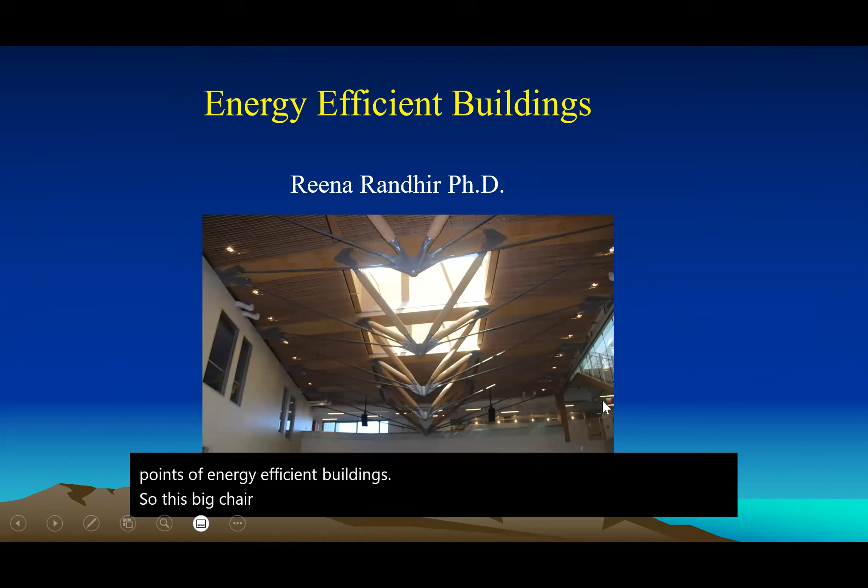We'll go over the most important points of energy efficient buildings. This picture is the ceiling of the green building at UMass, and there are lots of different concepts that were considered when building it. I hope you visit it one day.

The learning objectives of our time together are to understand the significance and benefits of energy efficient buildings, to describe the methods used to determine the efficiency of a building, some of the design elements, and what embodied and operational carbon of buildings is. We'll also understand some terminology in energy efficient buildings, like sustainable building, smart building, intelligent building, green building, and so forth, and some of the policies out there to make our buildings more energy efficient.

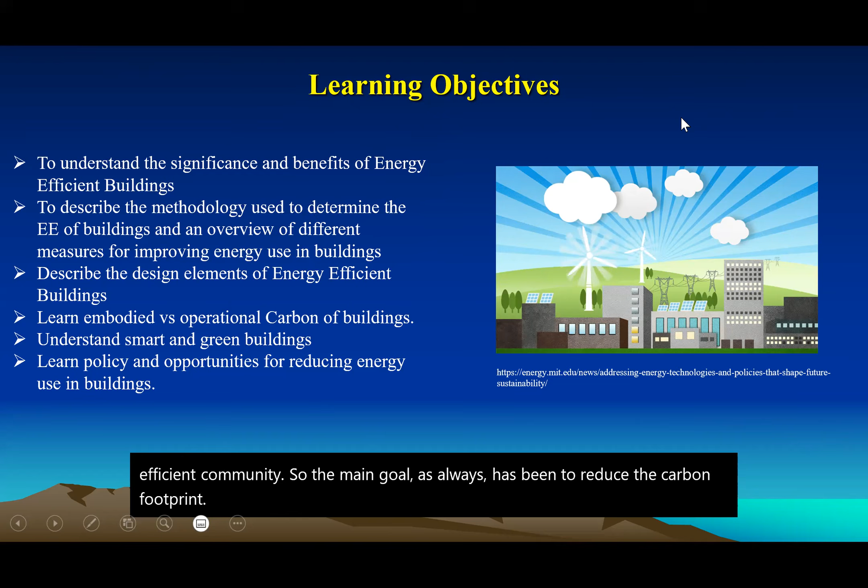So the objective as a community is to have an energy efficient city or energy efficient community. The main goal, as always, has been to reduce the carbon footprint as we transition to clean energy in the next 30 years. These are just some reminder slides.

A very interesting facet is that the richer the country is, the more energy consumption it has. The picture at the bottom shows GDP per capita, and the picture on the left shows that if it's orange or red, the per capita energy consumption is very high. So there's this correlation between GDP and energy consumption, and another correlation with the energy that goes into buildings. It shows that richer countries use more energy, and more of it goes into their buildings, which is also why the carbon footprint is higher in these countries.

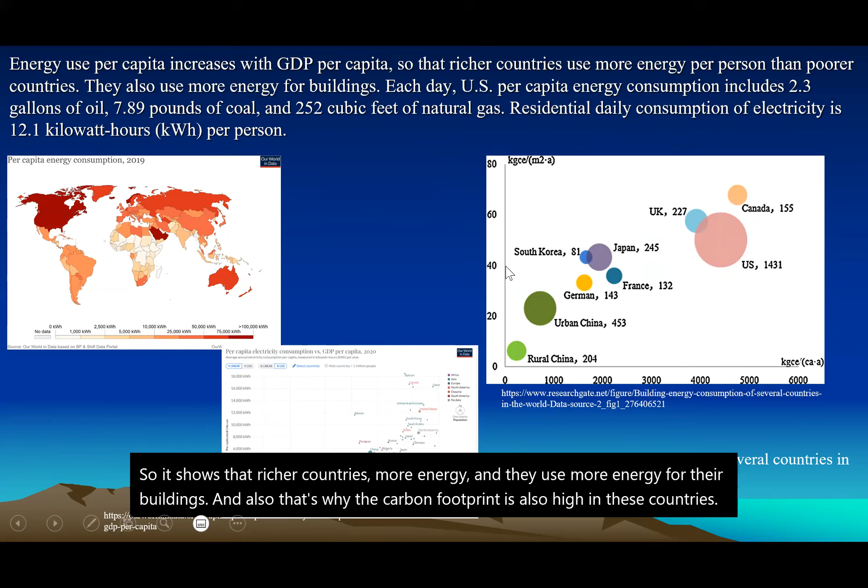Here's some alarming statistics. The United States has less than 5% of the world population, but we consume 16% of the world's energy. Compare that with Europe, which contributes only 6% of the world population and uses about 4.2% of the energy. So energy efficiency and reducing energy consumption in the building sector is vital as we try to meet our energy goals.

Here's another interesting fact: human beings spend about 90% of their time in buildings. The building sector accounts for 76% of electricity consumption, and 40% of that goes to buildings, meaning 40% of carbon emissions come from buildings. That is why it's very important for us to understand energy use by buildings.

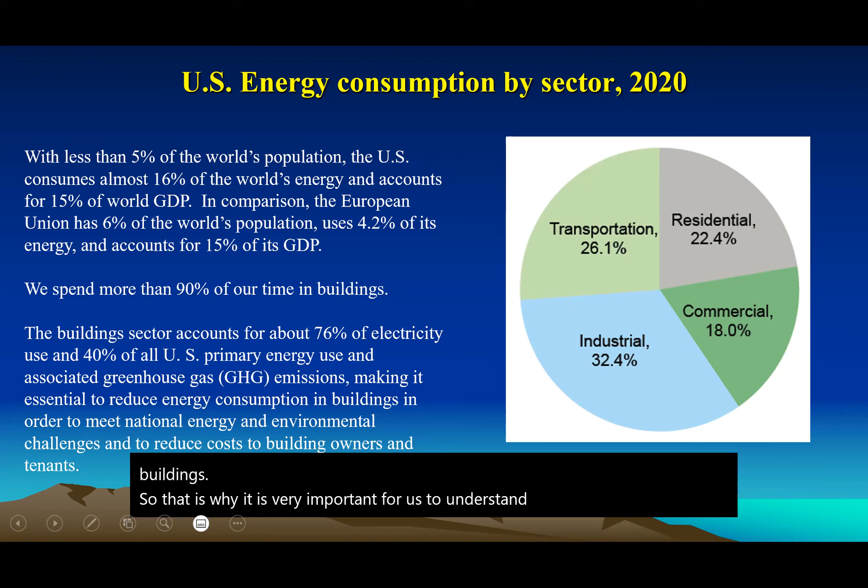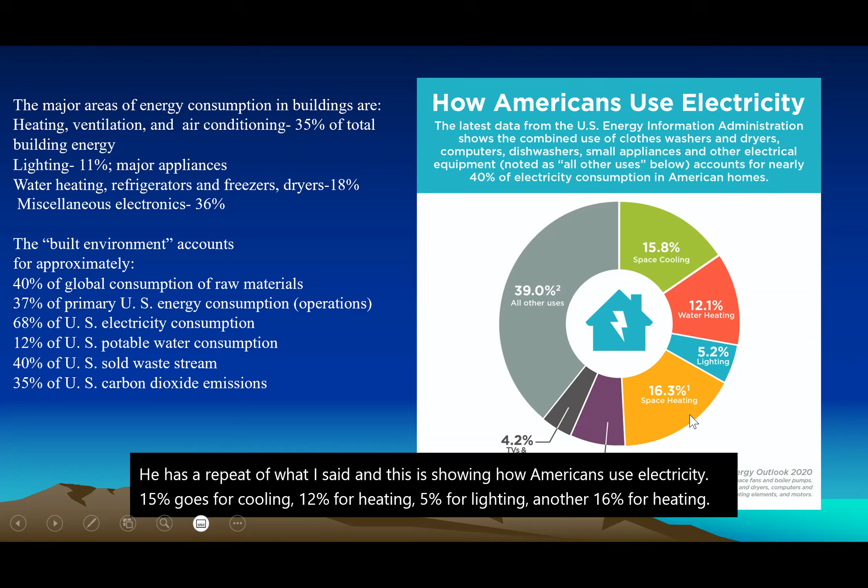Here's a repeat of what I said, showing how Americans use electricity: 15% goes for cooling, 12% for water heating, 5% for lighting, and another 16% for heating. So a majority of greenhouse gas emissions come from buildings.

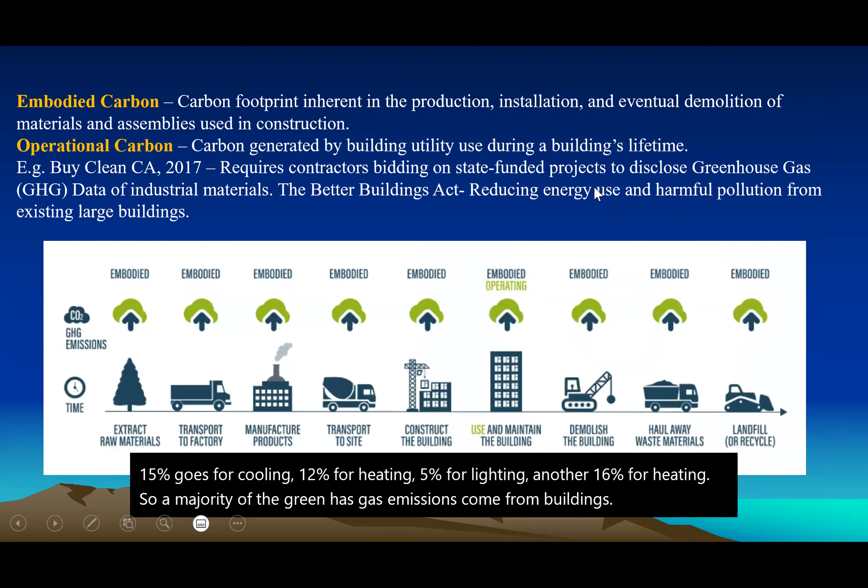This slide shows what embodied and operational carbon is in buildings - like a life cycle of carbon emissions from the beginning to end of a building's history. Embodied carbon refers to the carbon footprint involved in the production of building materials, transport, installation, demolition, and recycling.

Operational carbon refers to the carbon that is emitted when the building is operational, like utilities and so forth.

There are many government agencies that monitor this. The Buy Clean California Act of 2017 required that contractors disclose the greenhouse gas emissions of their building materials. There's another act, the Better Buildings Act, that reduces the energy use and pollution from large buildings. This is only a sample - there are several of them.

This picture shows the timeline of greenhouse gas emissions. When raw materials are extracted - in this case, wood from a forest - if it's a sustainable forest that's replanted, the carbon footprint is low. But in general, if trees are just cut down for buildings, it releases a lot of carbon dioxide into the atmosphere. Transport costs the environment, and when the material is processed and changed, it also costs the environment. Then it's transported to the site where the building actually happens.

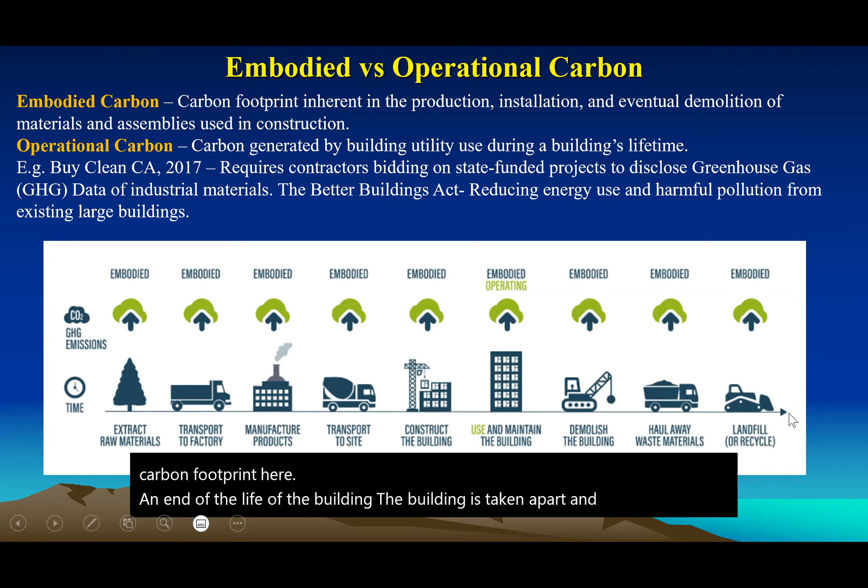After the building is built, there is both embodied and operational carbon footprint. At the end of the building's life, it is taken apart and maybe taken to a landfill or recycled, and again carbon emissions continue. So a builder thinking about energy efficiency should consider reducing energy use at every step of the carbon cycle of a building.

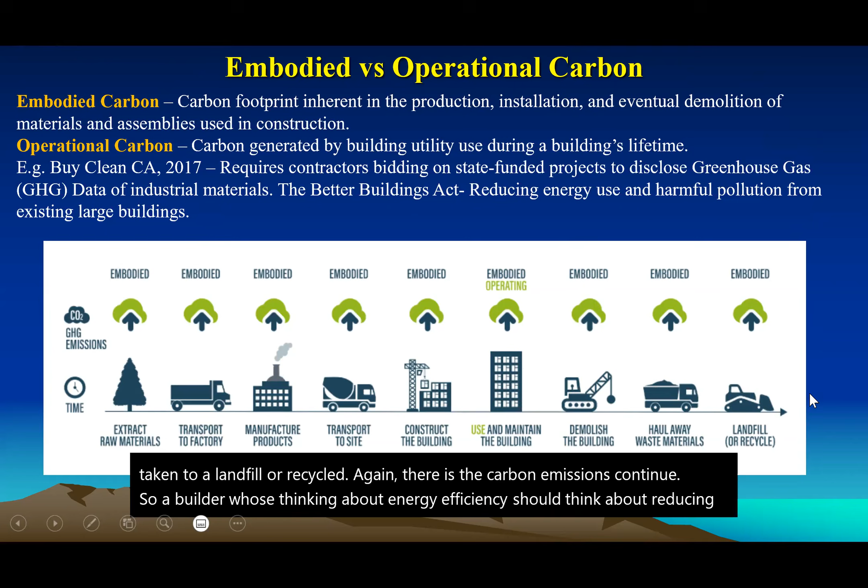So what is an energy efficient building? An energy efficient building is defined as a building that is designed. It begins even before the building is built, so design elements will be considered to reduce the energy use in a building.

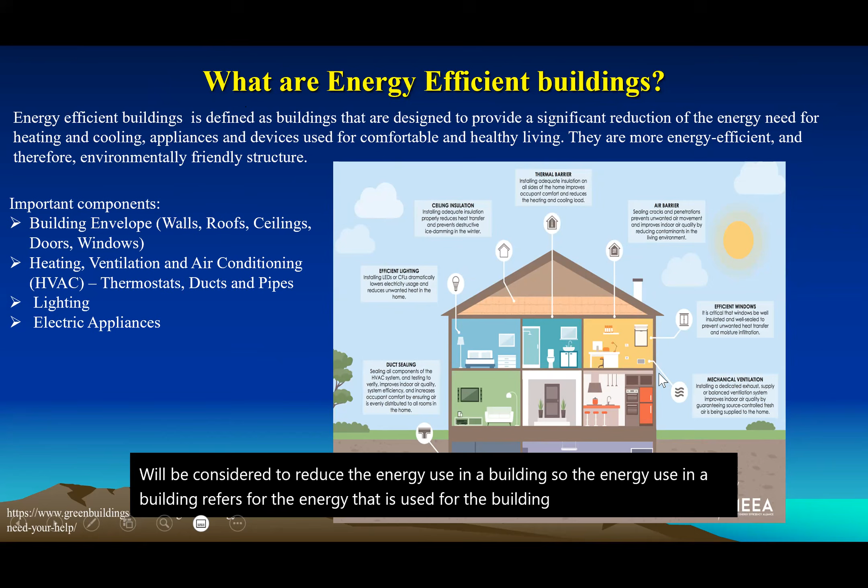The energy use in a building refers to the energy used for the building envelope, which is very important—insulation is very important—HVAC, the heating, ventilation, and air conditioning of the building, the lighting of the building, and all the appliances used in a building.

So an energy efficient building is environmentally friendly, using just the bare minimum of energy that is needed for comfort, safety, and security of the people who are living there.

It is divided into 4 categories. One would be the envelope of the building, which refers to the walls, the roofs, the ceilings, windows, doors, etc. For example, we have seen ceiling insulation in our homes, right?

It is very important to keep the heat in, especially in cold countries like ours, states like us. Thermal barriers, air barriers—all of these will play a huge role in energy efficiency.

Efficient lighting—this is like a summary picture, a typical home with a basement, first floor with kitchen and living room, and then the bedrooms are upstairs with bathrooms.

Energy efficient windows—we've heard of double pane windows, and also there's energy efficient paint that can reflect hot waves in the summer.

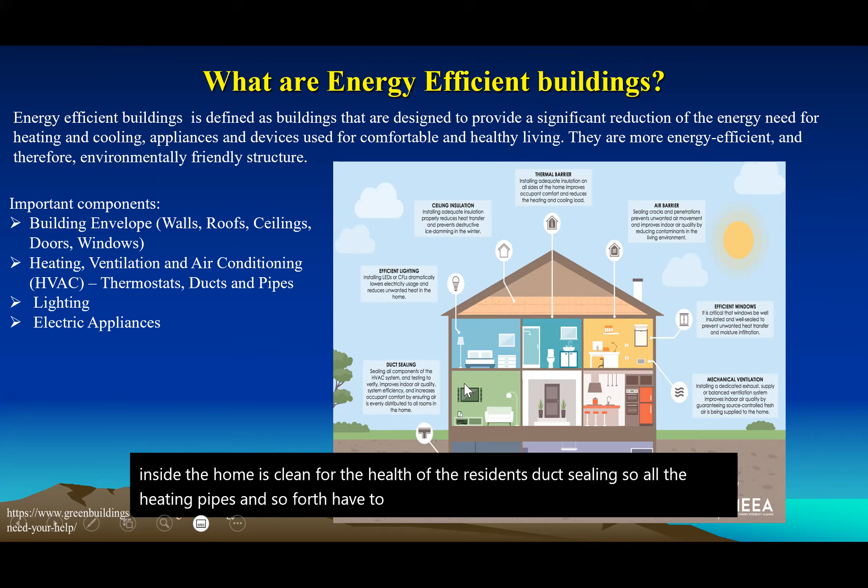Duct sealing—all the heating pipes and so forth have to be sealed and insulated in order to conserve energy.

What are some of the benefits of energy efficient buildings? Of course, as the word says, it's energy—we are saving energy, thereby environmentally friendly. For the owner of the building, he saves money by being energy efficient.

Reducing electricity for lighting and energy efficient appliances will help him reduce energy, lower maintenance cost. It will enhance the property value. But the most important thing is it's environmentally friendly.

So when we turn off the lights that aren't in use in a home, we are being energy efficient—little things like that, taking shorter showers, unplugging your computer, and so forth.

And this is like—now you would have heard of zero energy buildings. This is the goal of many institutions now, so they're going with green roofs and solar panels, even wind, harvesting renewable energy sources.

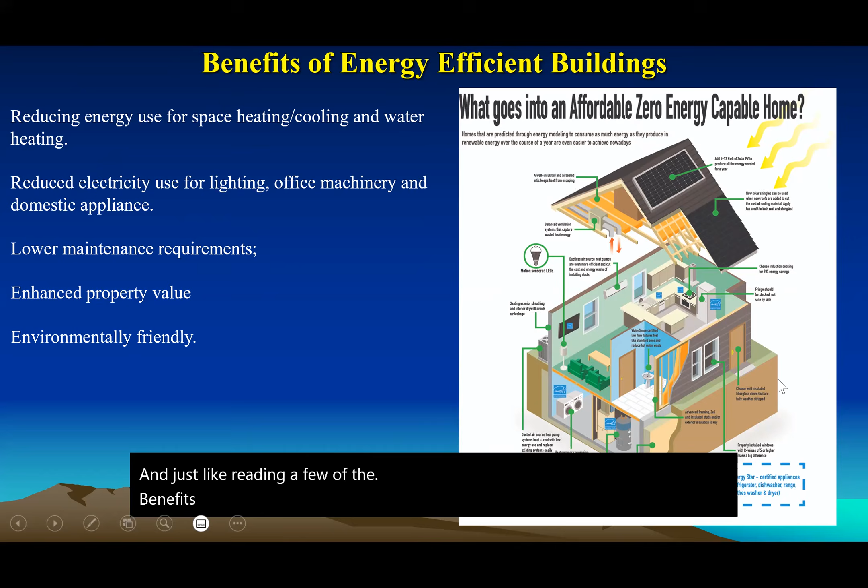Motion sensor bulbs, and just reading a few of the benefits mentioned here. This is the energy efficient building, John W. Olver Design Building at UMass.

Sometimes I take the students for a field trip here. This is LEED certified—LEED refers to Leadership in Energy and Environmental Design. It is a rating system for design, construction, operation, and maintenance of buildings.

So it is like a rating system—you'll come across LEED, and if it's LEED certified, the building is very sustainable and green.

So when you say green building or sustainable building, the definition of sustainability is you take into consideration the 3 P's, right? Planet, people, and profit. So we are applying the principles of sustainability in a building, in the structure and application process that is environmentally responsible, and there is also a profit to people.

So this thinking goes from planning the building, the site construction, site details, design details, operation, construction, maintenance, renovation, and demolition of a building. So if it has to meet the 3 P's of sustainability, it has to efficiently use energy, water, and all the natural resources.

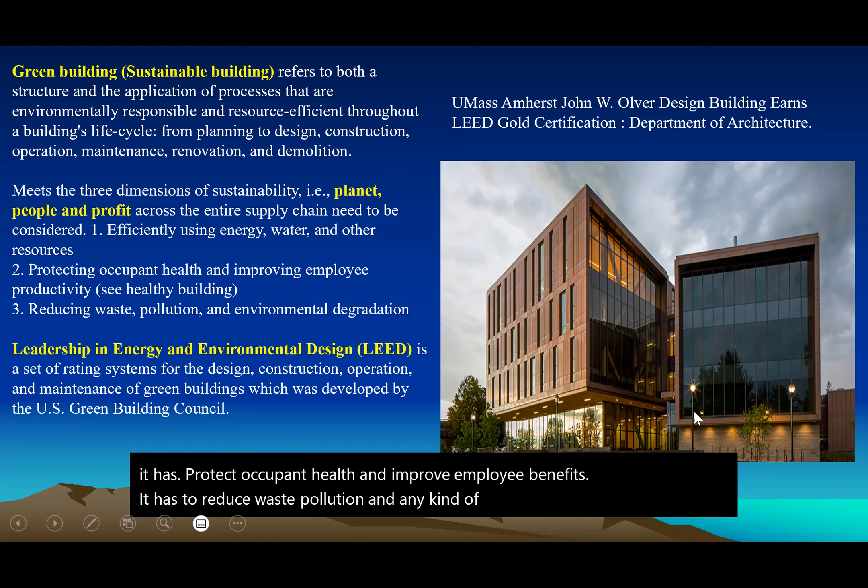So how to design an energy efficient building? There are 3 main steps. One is called bioclimatic architecture, where you take into consideration the shape of the building, the orientation of the building, the solar protections in that region, and make it as passive as possible. That is called bioclimatic architecture.

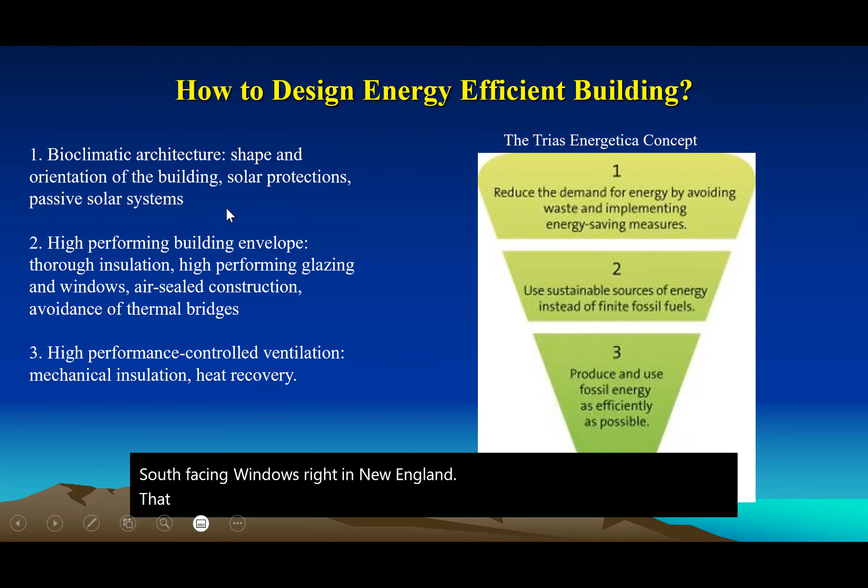That means you're taking into consideration the environment of the region to harvest its benefits passively without using energy. Like you would have heard of south-facing windows, right, in New England, that will harvest the most light and keep the homes warm in winter.

The second concept is high-performing building envelope. This is where the insulation comes into place—glazing of windows, double pane windows, sealing of your attics, and avoiding thermal bridges.

So this is where the most energy is lost—they are like junctions in water pipes and so forth. And high performance ventilation, because ventilation is vital for human health—we have to get rid of the stale air and bring in fresh air.

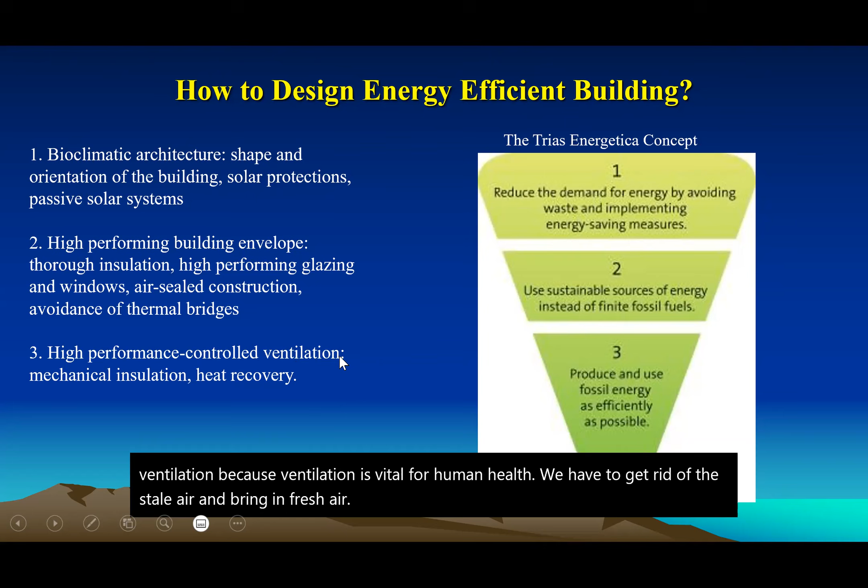But like modern architecture, it's all about aesthetics, high ceilings and so forth, but it's not very energy efficient.

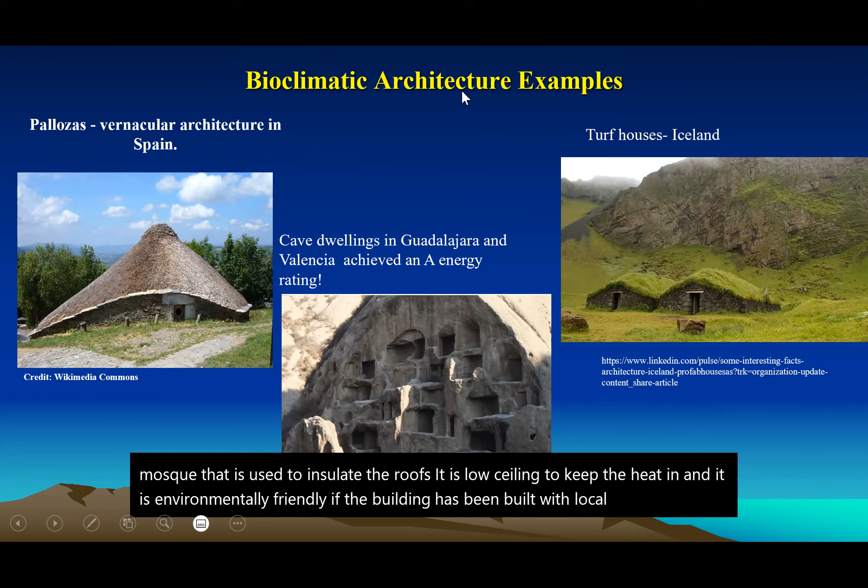These are just some examples of bioclimatic architecture, but let me show you some more. In bioclimatic architecture, we are taking into consideration the local climate and making the best use of solar energy and other environmental sources.

So here you will take into consideration the height of the building. For example, in New England, if the ceiling is very, very tall, it is not energy efficient for a home.

So the layout, even the colors - if the building is dark, or sometimes even the buildings are intentionally painted in a dark paint in order to conserve heat.

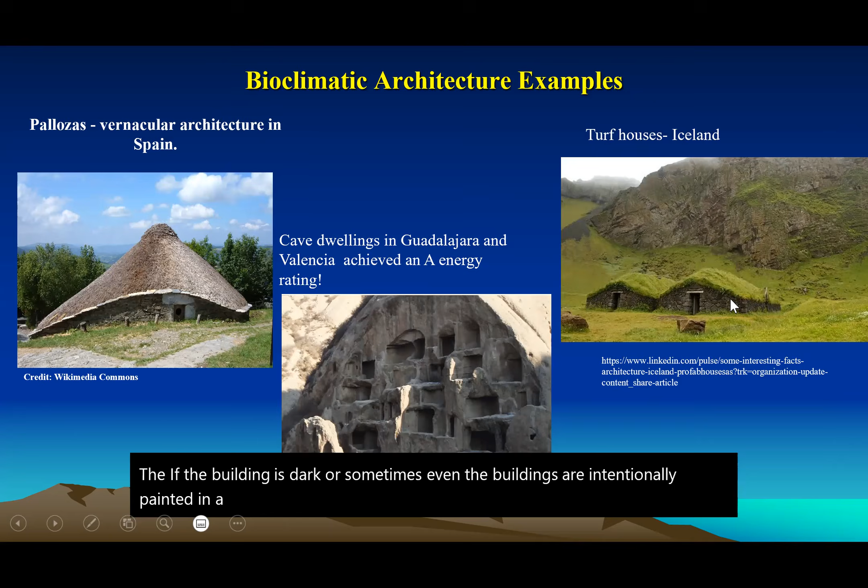So all to make the best use of energy and passive energy. Passive would be like triple glazed windows. So when needed, it will reflect heat, and sometimes it traps the heat to keep it warm. Thermal insulation of the walls, making sure everything is airtight. Solar panels for renewable energy, and ventilation for recycling of the air.

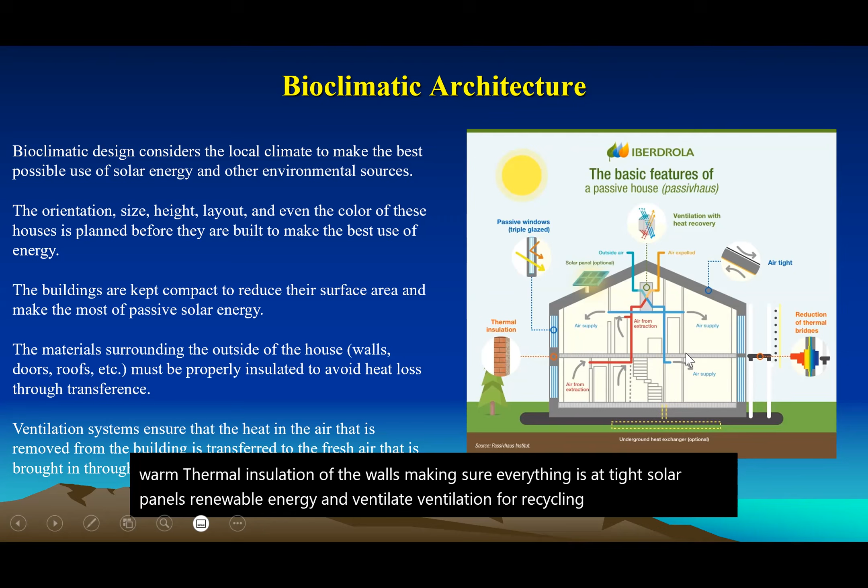Here's more examples. Even water and plants are very important in hotter climates. Here you can see how they are using plants to cool the building. If you go to Singapore and Malaysia, this is very common. You can see it's not only beautiful, but it's also trying to grow plants to reduce the carbon footprint of the building.

Thermal accumulators, such as heat exchangers and pumps, will capture the solar energy and use it at a time when it's needed, making sure the building is airtight.

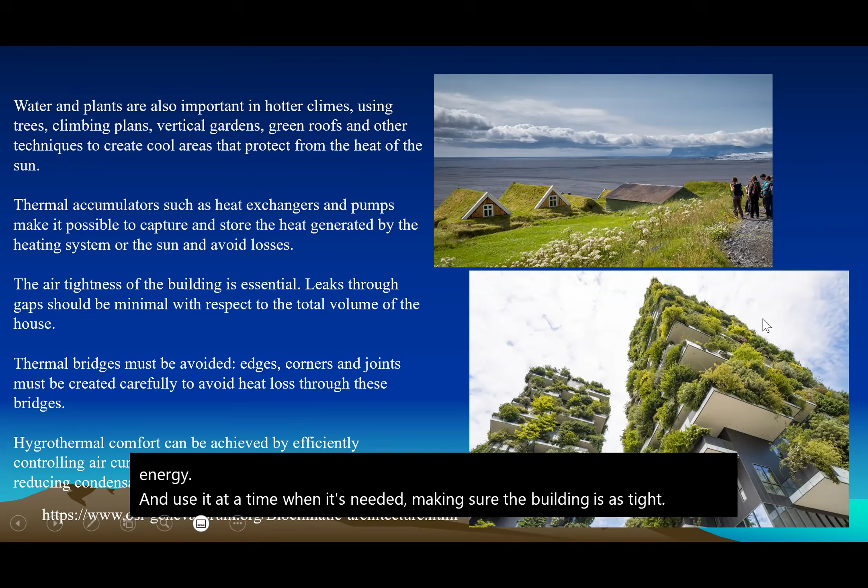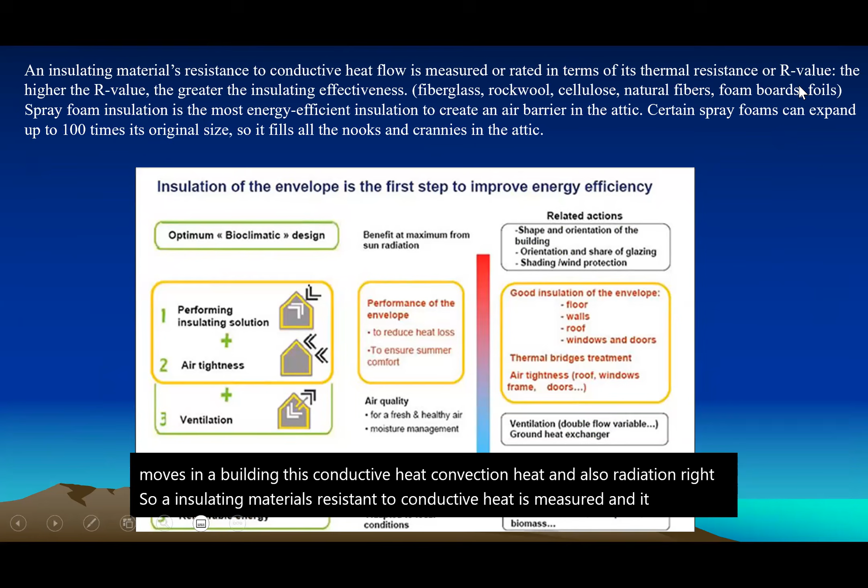Moving on to insulating materials, because when you think about heat and how it moves in a building, there's conductive heat, convection heat, and also radiation. Insulating materials' resistance to conductive heat is measured and rated, and it is called an R value. So the higher the R value of the insulating material, the better it is.

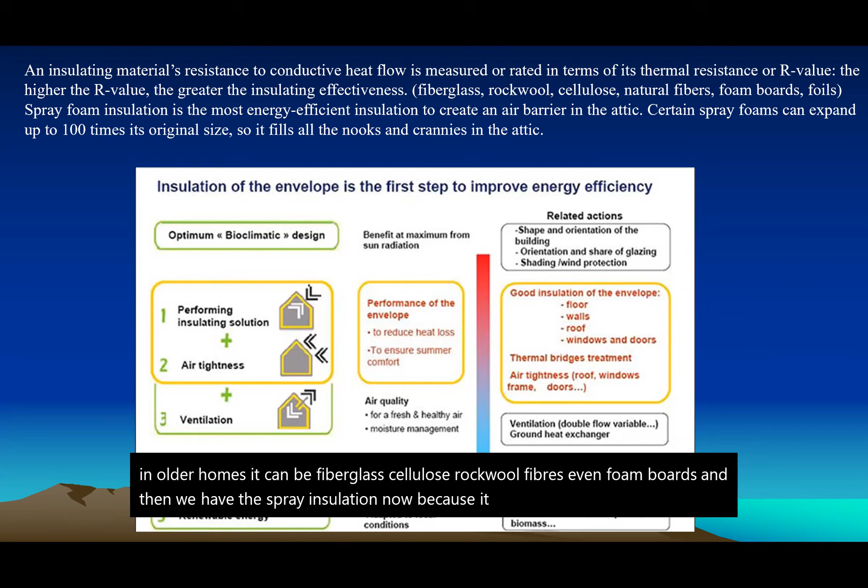Again, imagine the attic - we have that cotton wool kind of material in older homes. It can be fiberglass, cellulose, rock wool fibers, even foam boards. And then we have spray insulation now, because it'll come from a pipe under high pressure, and it can reach all the nooks and crannies, making sure it's airtight and there's no heat escape during the winter months. So it is a very effective form of insulation, the spray insulation.

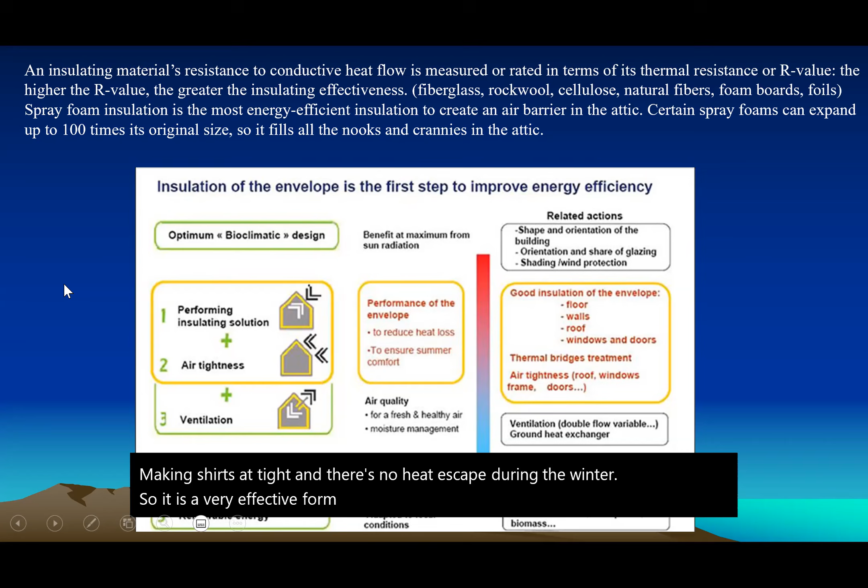So when insulation is considered, this would be the first step. When an audit comes, this is what they're looking for - how efficient is the building in conserving energy? So they will look for air tightness and also ventilation. Air quality is also important.

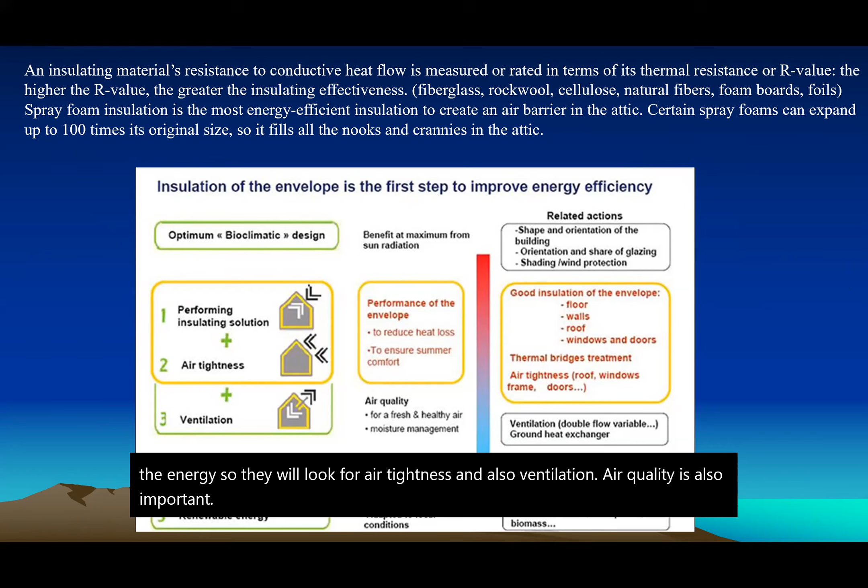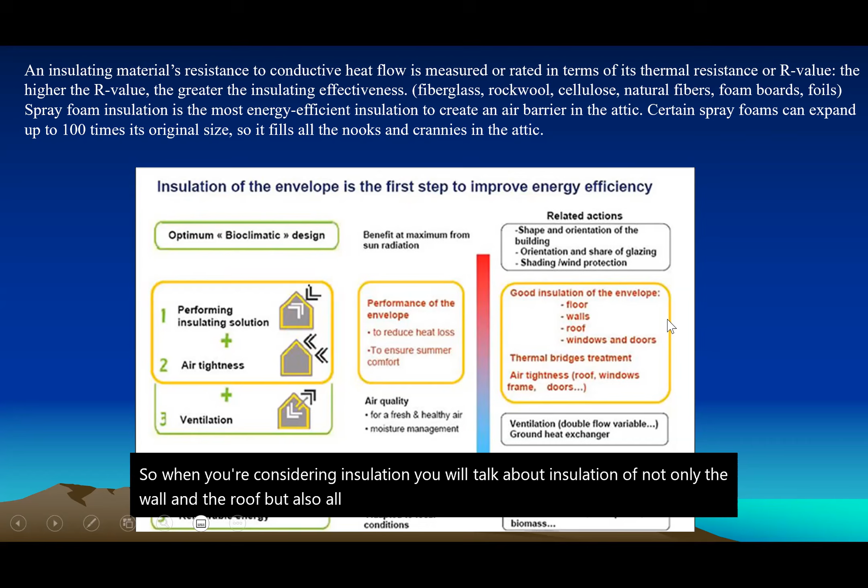So when you're considering insulation, you will talk about insulation of not only the wall and the roof, but also all the windows. So energy efficient windows and doors are very important. High performance controlled ventilation.

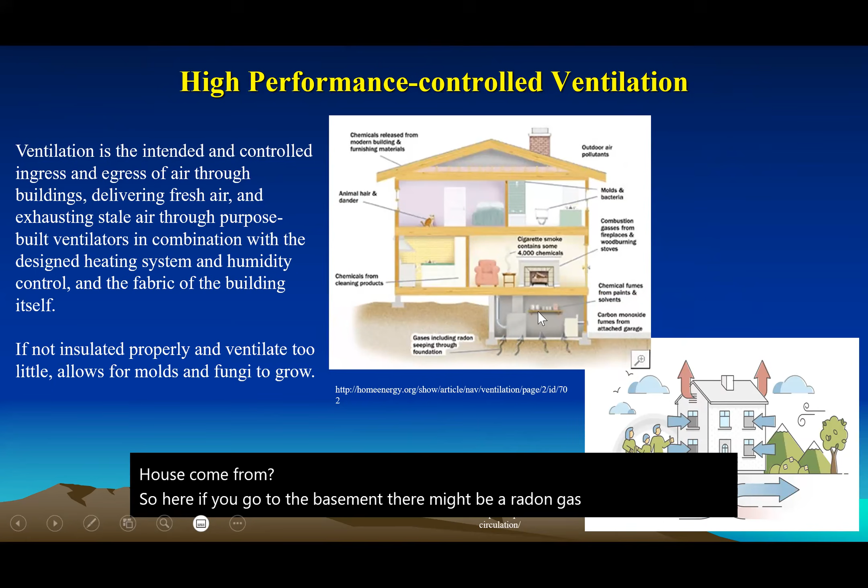So where do the pollutants in the house come from? If you go to the basement, there might be radon gas diffusing through the floor. And if you're storing a lot of paint and stuff like that, there can be paint fumes, chemical fumes. If the garage is closed, there can be carbon monoxide poisoning.

We've heard these have been in the news. And cleaning products in the kitchen. If there is a smoker in the house, there's smoke from cigarettes. All of this - if you have animals like we do, there's hair all over the place. Mold - if the bathroom is not cleaned routinely, there can be mold and bacteria growing. So all of this is very harmful for human health.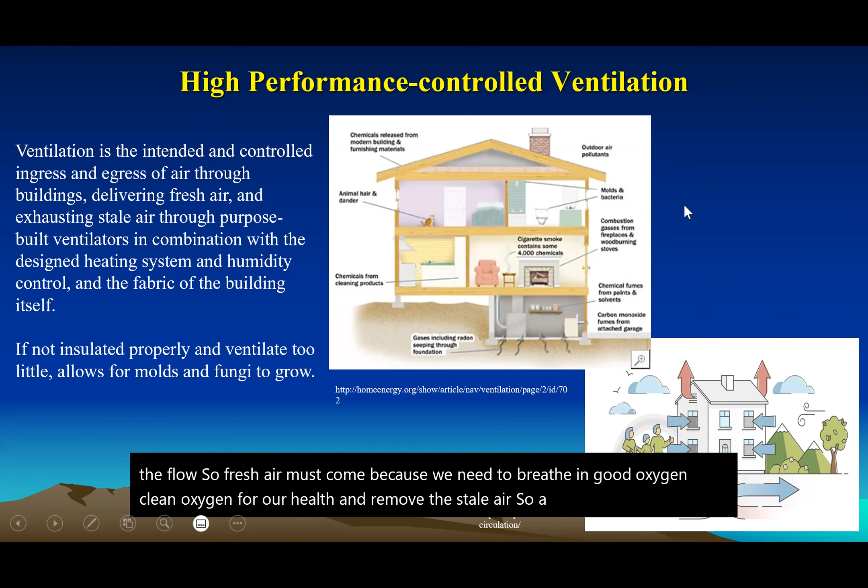That is why a high performance ventilation system that will control the ingress and egress, meaning the airflow inside and outside, is needed. Fresh air must come in, because we need to breathe clean oxygen for our health, and remove the stale air. So a good ventilation system is very important, and it goes hand in hand with the HVAC, the heating and cooling systems of the building.

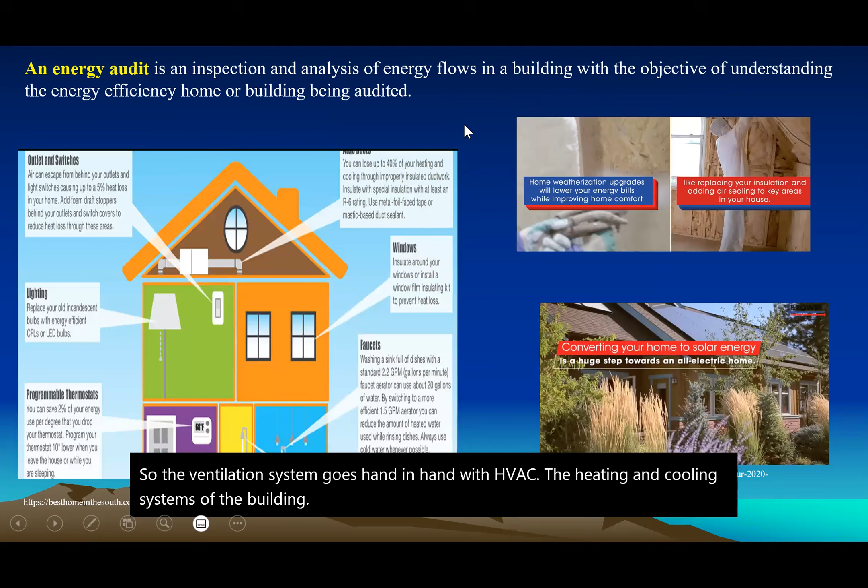When people say energy audit, this is free. The government provides it, and provides a lot of incentives also. So like in Massachusetts, if you're a homeowner, if you do an energy audit, they will come and inspect your home. They will analyze the energy flow in the home with the goal of reducing your energy cost.

They even give free LED bulbs when they do the energy audit. Here is some of the things they check: air can escape from your outlets and light switches, causing 5% of the heat loss in your home. It is wise to have programmable thermostats.

If there's no one in the house, why waste energy during the day when you are at work? So you can set your thermostat. That is a smart thing to do. Windows - they will ask you to insulate your attic and your windows where heat loss is common.

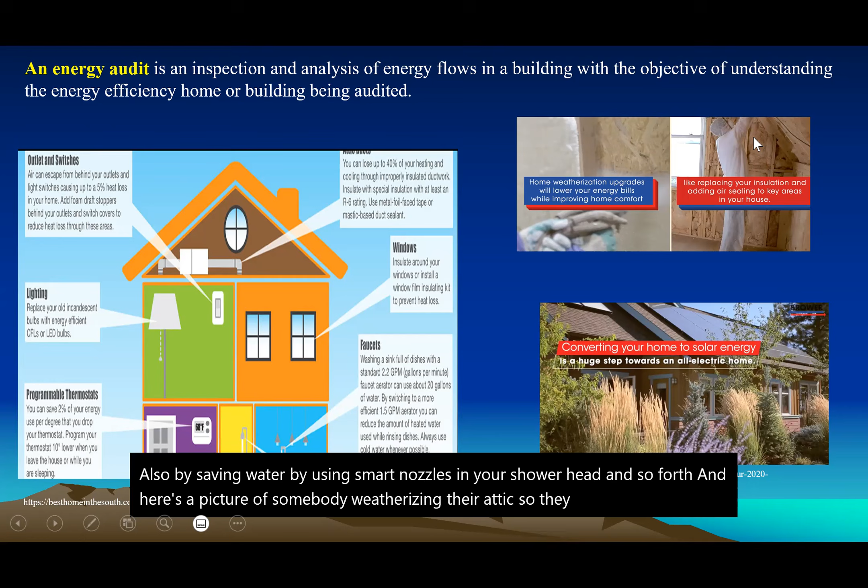Also, saving water by using smart nozzles in your shower head and so forth. Here's a picture of somebody weatherizing their attic, insulating the house. Also, to make the house more renewable, it is advantageous to have solar panels, and you can see the solar panels on the south facing windows.

Here's a very common sight when you are buying appliances. We always look for energy efficient appliances, because in the long run it can save you money. Apart from saving energy, it is saving you money. This is an initiative of the United States Environmental Protection Agency and the United States Department of Energy.

We have been taught to look for this blue label with the Energy Star when we are buying even a microwave or a stove, all appliances like fans and space heaters and any appliance that you might use. That is the standard for appliances.

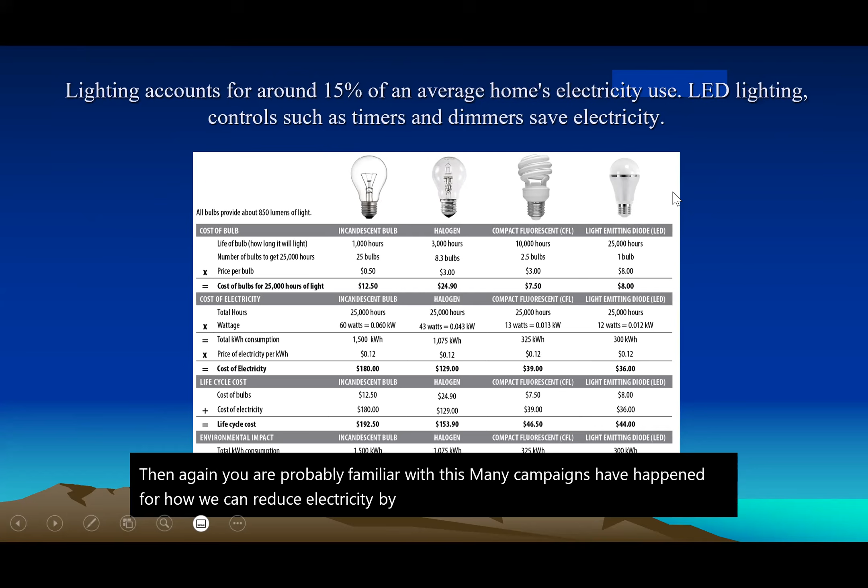Again, you are probably familiar with this. Many campaigns have happened for how we can reduce electricity by using the right bulb. Lighting accounts for 15% of the energy use, so the best thing is to turn it off when not in use. But LED lighting, light emitting diode, is the most efficient.

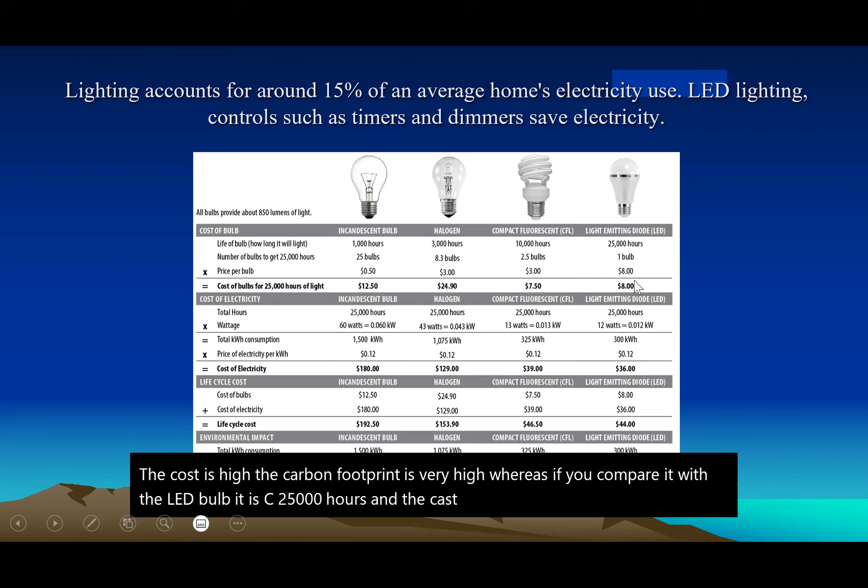It's many-fold less, 4 to 5 times less. It's using less electricity, and its environmental impact is less also.

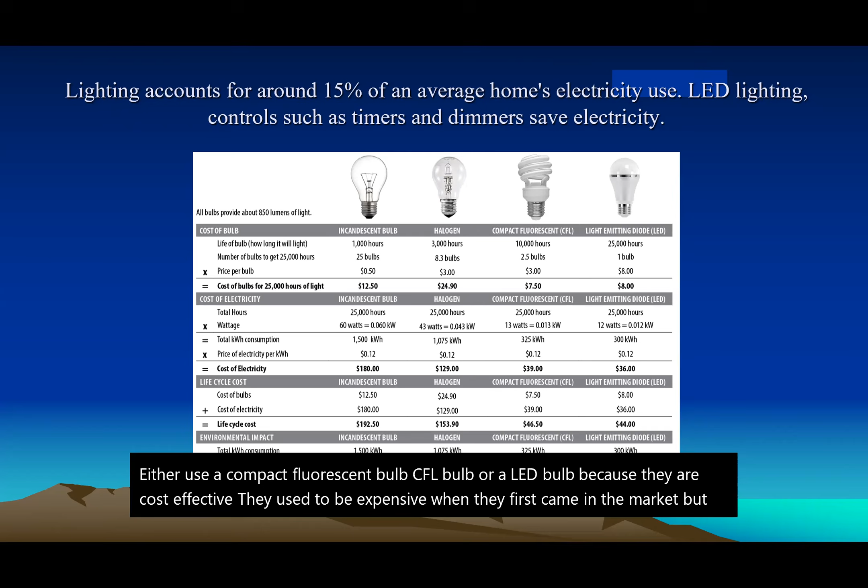So the wise choice would be to use either a compact fluorescent bulb, CFL bulb, or an LED bulb, because they are cost effective. They used to be expensive when they first came onto the market, but now with several government incentives, it is cheap now.

What is an energy efficient building? This is the transition into the future - it's similar to an intelligent building, which we call a smart building. The smart building uses communication technologies like Internet of Things or sensors, software, and online connectivity to monitor different aspects of the building. Then it will collect data, analyze it, and generate smart decisions in order to reduce energy use in a building and make it more efficient.

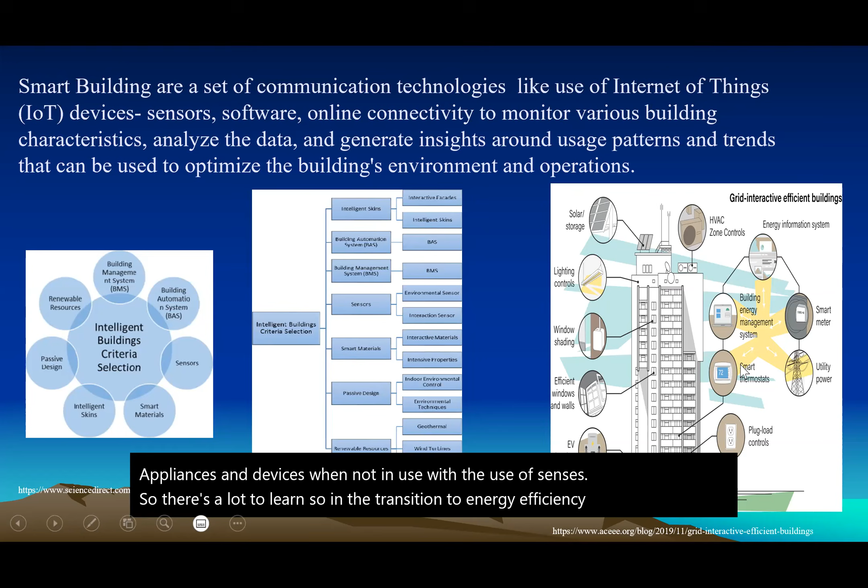This is the building of the future, where it uses energy only as required, and it is smart. It will turn off appliances and devices when not in use with the use of sensors. There's a lot to learn. In the transition to energy efficiency, buildings are very important because they take 40% of the energy use in the world. I hope that was helpful.